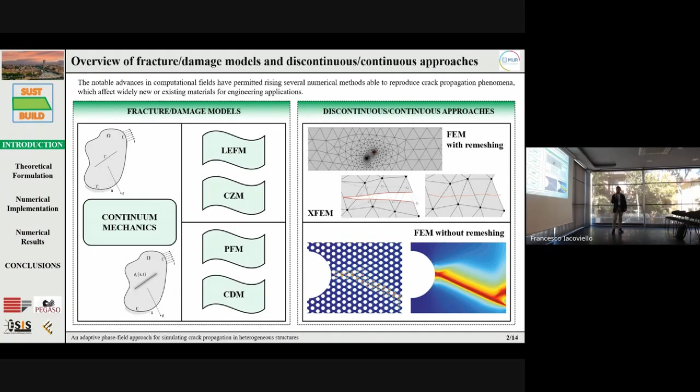So, in recent years, the notable advances in computational fields have permitted using several numerical methods able to reproduce crack propagation phenomena which affect new or existing materials for engineering applications. So, continuum mechanics employs fracture and damage models, such as linear elastic fracture mechanics or cohesive models, or continuum damage mechanics or phase field methods, together with numerical models, like, for example, the finite element method with and without remeshing, or the extended finite element method, etc., to model discontinuous deformation.

So, fracture is a common failure mode of engineering materials and structures, and preventing failure caused by cracks is a significant concern in engineering design. Like in many other physical phenomena, computational modeling of fracture is an essential tool for providing knowledge into the fracture process of various materials, such as concrete, metals, nanomaterials, etc.

And numerical simulation represents an effective tool to assess structural integrity, especially when full-scale experiments may be too expensive or not replicable. In addition, developing advanced numerical approaches that ensure a suitable compromise between computational cost and good prediction is attracting considerable attention from the international research community.

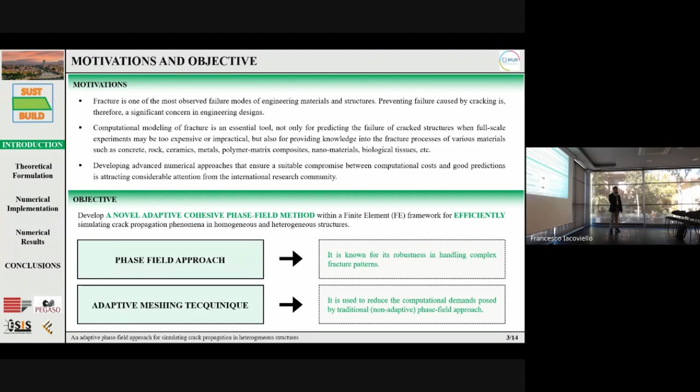And for this reason, in this work, we present an efficient cohesive phase field model within a finite element framework for accurately reproducing crack propagation phenomena in both homogeneous and heterogeneous structures. In particular, the proposed approach enhances the traditional phase field approach, known for its effectiveness in simulating intricate fracture patterns, with the adaptive mesh technique to reduce the computational demands posed by, for example, heterogeneous materials.

So, an overview of the cohesive phase field model proposed by Wu is now presented. In general, the phase field model replaces the sharp crack interface with a diffusive interface, characterized by a crack phase field variable, phi c, which evolves between 0, intact material, and 1, fully cracked material. The crack surface density function is central to the formulation and is expressed in terms of phi c and its spatial gradient. Here appear also the length scale L0, which regularizes the sharp crack, and the crack geometry function alpha, which defines how the material stiffness degrades as the crack evolves.

The parameter xi controls the regularization model behavior, and it ranges between 0 and 2, and in Wu's model xi is equal to 2. The governing equation in weak form for the crack propagation problem is the following, where H is the history variable and W represents the energy degradation function, which are evaluated through the following expressions. So the function W also depends on 3 parameters, A1, A2, and A3. In particular, A1 is calculated via this formula and depends on both the length scale L0 and the characteristic length LC, while A2 and A3 depend on the softening curve.

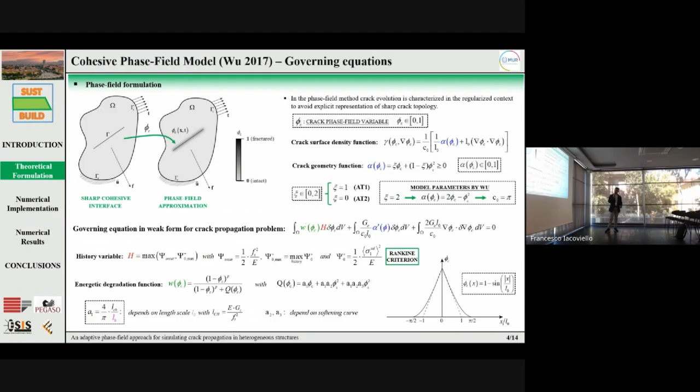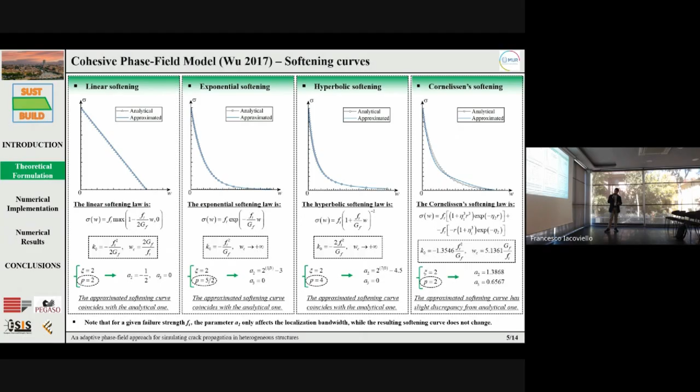The adaptive mesh technique is now presented, emphasizing its crucial role in the proposed approach for improving computational efficiency by focusing mesh refinement only in the region where damage nucleation and propagation are expected to occur. So the key elements of the adaptive mesh technique are essentially three. The first is to divide the computational domain into a grid of macro elements. The second is to remove the macro elements within a zone of interest, which must contain the expected location of damage nucleation. And the third is to choose an appropriate criterion, which defines where and when the refined mesh should be introduced. So this criterion is based on the damage characteristic field variable at the micro-macro interface.

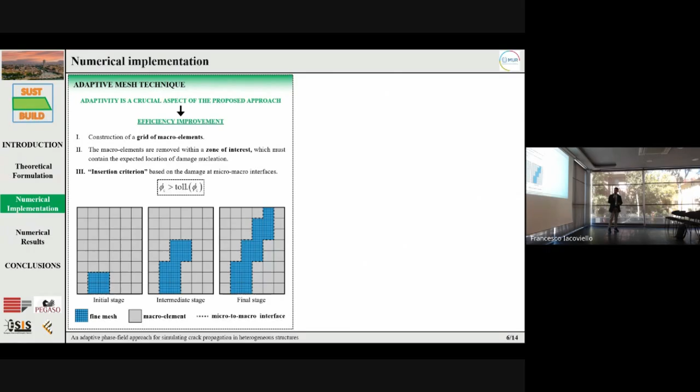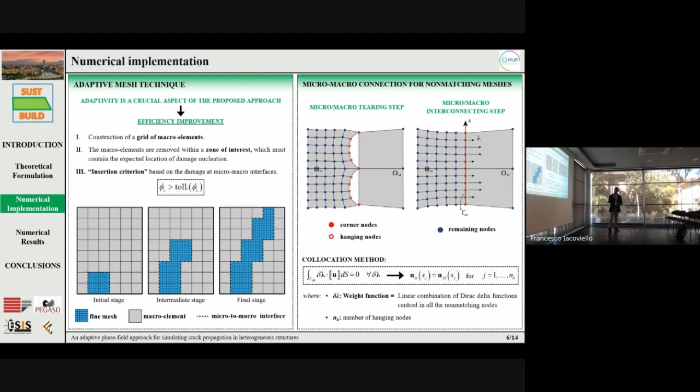So the crack propagation process is managed by an automatic algorithm. The analysis starts by defining geometry, material properties, and boundary conditions. So the computational domain is divided into a macro subdomain, and within a zone of interest, micro subdomains are inserted. So at the interface between micro and macro subdomains, continuity conditions are imposed to ensure that the transition between two different meshes does not introduce artificial discontinuities in displacement fields or stress. At this point, the analysis starts by increasing the control displacement.

For... In the macro subdomains are meshed with a single finite element, while the micro subdomains are discretized using a fine mesh.

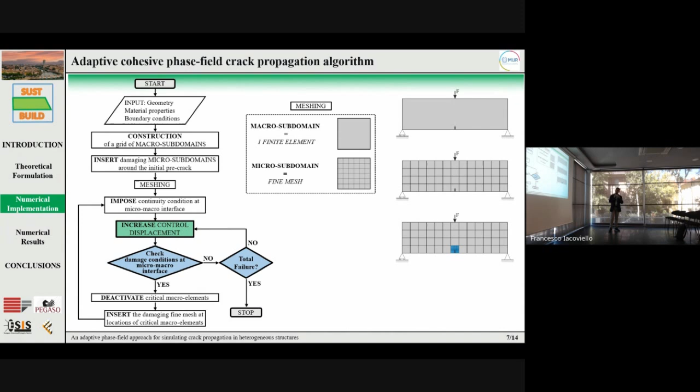After that, the analysis starts by increasing the control displacement, and for each increment, the code checks the damage condition at the micro-macro interface. So the interface where the crack damage variable is greater than a set threshold is marked as a critical micro-macro interface, and the adjacent macro subdomain is marked as a critical macro element.

Once a critical macro element is found, it is deactivated, and the damage fine mesh is inserted in this region. Finally, the code checks if the structure reaches failure. If total failure occurs, the analysis stops. If not, the process continues, refining other regions as the damage progresses.

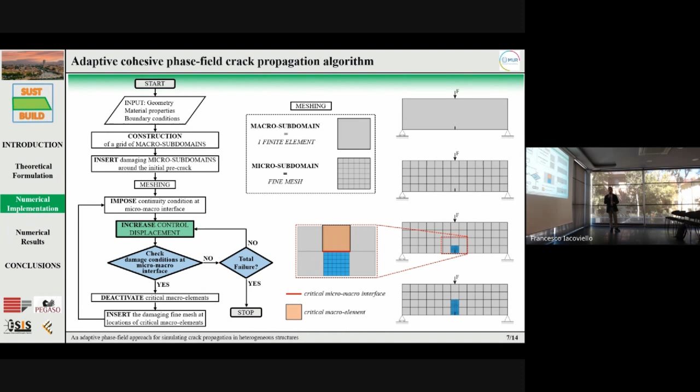So now, to verify the efficacy of the present method, two crack problems are presented. The first is a mixed mode failure test of a notched concrete beam having the following material properties, and Cornelissen softening curves are employed to capture the material degradation during the crack propagation.

So the zone of interest consists of 4 microsubdomains, and the mesh of a single microsubdomain involves 2017 nodes and 3,912 elements. The slide reports a comparison in terms of load versus crack mouth opening displacement between the present method, the experimental data, and the predictions provided by other numerical strategies.

We can see that the obtained curves are in good agreement with the experimental data and the numerical results provided by others, thus denoting the reliability of the present method for predicting crack initiation, propagation, and failure. In addition, we can see snapshots of the damage profile during 3 steps of the propagation.

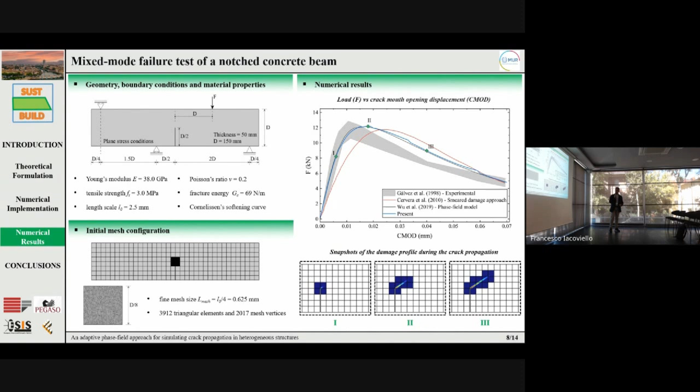Now, comparisons between non-adaptive and adaptive schemes are reported for evaluating the computational efficiency of the present method. Note that to reproduce the non-adaptive scheme, the microsubdomains are activated at the beginning of the simulation. This slide demonstrates the advantage of the adaptive scheme. In fact, the non-adaptive and adaptive curves for load versus crack mouth opening displacement are almost the same, denoting that the adaptive scheme does not compromise the accuracy of the simulation.

In addition, the adaptive approach provides a more efficient simulation, because it significantly reduces the computational time, with a reduction of about 68%, and the number of cumulative degrees of freedom, with a reduction of 70%. This occurs because, as we can see from the crack growth evolution and the final mesh configuration, the adaptive scheme dynamically refines the mesh only in the region where crack propagation takes place.

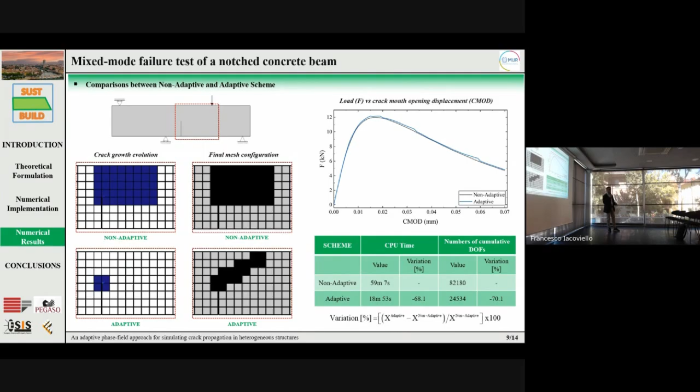The second example involves a 3-point bending test of a perforated beam with an eccentric crack. Starting with the geometry of the macroscale domain, the beam has a length of 120 millimeters and a height of 80 millimeters. On the right side, instead, we see the geometry of the microscale domain, where each perforated microstructure or microsubdomain consists of a square cell with a centered hole.

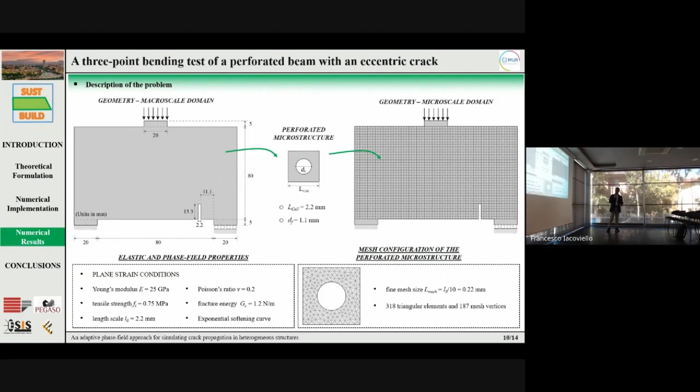The elastic and phase field properties are the following. In this case, exponential softening curves are used to capture material degradation during crack propagation. The fine mesh of the microsubdomains involves 187 nodes and 318 elements. The animation of the damage profile during propagation shows the ability of the proposed method to refine the mesh only in the region where this is necessary.

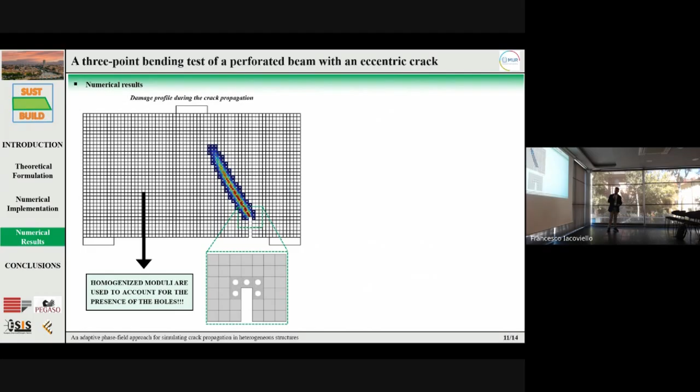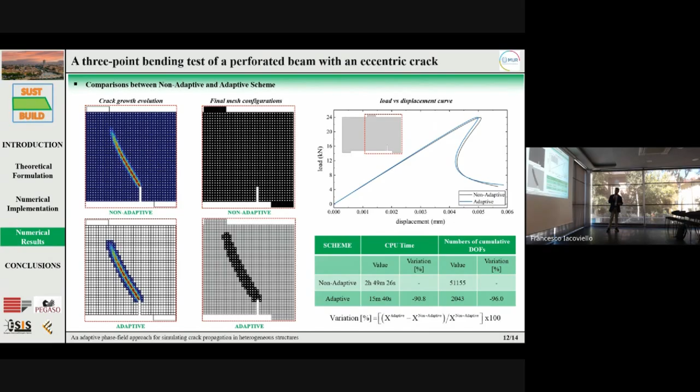Also for this example, we report the comparison between non-adaptive and adaptive schemes. The slide also shows in this case the advantage of the adaptive scheme. In fact, there is an improvement in computational efficiency compared to the previous case. The computational time has a reduction of about 91%, and also the number of degrees of freedom. These results make the proposed adaptive approach more suitable for complex crack problems where computational efficiency is crucial.

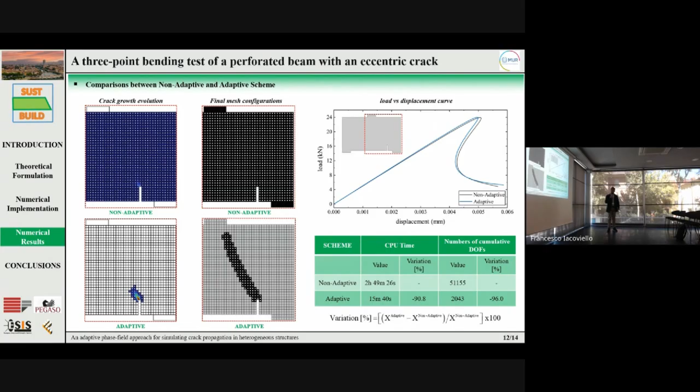So, in conclusion, an efficient finite element adaptive phase field model for reproducing crack propagation phenomena in both homogeneous and heterogeneous structures is proposed, which enhances the traditional phase field approach by incorporating an adaptive mesh technique, allocating computational resources only where necessary, thus improving computational efficiency while maintaining accuracy.

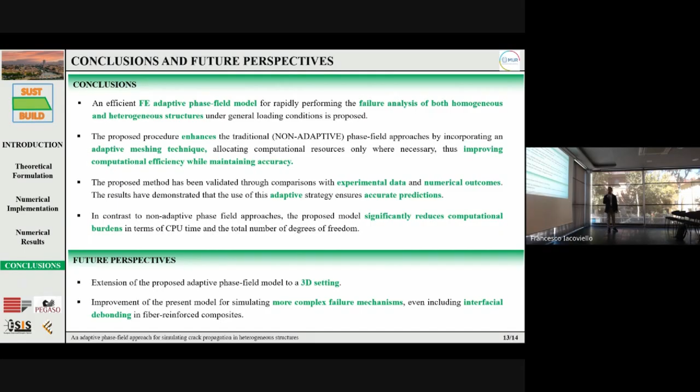The proposed method has been validated through comparison with experimental data and numerical results, denoting that this strategy ensures accurate prediction. In addition, compared to the non-adaptive phase field approach, the proposed model significantly reduces computational burden in terms of computational time and total number of degrees of freedom. Future perspectives include extending it to a 3D setting and enhancing its capability to model more complex failure mechanisms, including interfacial debonding in fiber-reinforced composites.